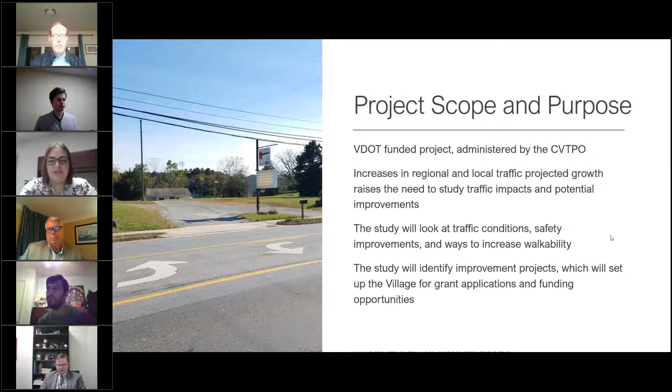The project purpose and scope: this is a VDOT funded project being administered by the Central Virginia Transportation Planning Organization. The need for this study has increased due to regional and local traffic and the growth that's projected. The study will look at traffic conditions, consider safety improvements, and ways to increase walkability and multimodal access. It will identify improvements which will set the village up for funding opportunities in the future. This initial meeting is to get your feedback on the issues and concerns you've seen, so we can move forward in identifying what improvements can be made.

Starting here, we're in the initial phase, shown on the left-hand side of the screen, which is doing the initial traffic analysis. We'll go on to create the study, make plans, and seek funding for those, and then eventually get to construction. So we're in the pretty early phases of the project, and this is the best time to start getting your feedback on what you'd like to see in the future.

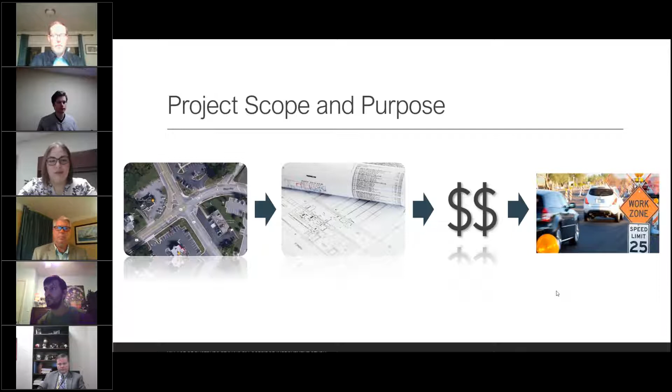So I'm going to hand it over to Bill, who's going to continue on. Thanks, Ada. As we go through the presentation tonight, the purpose is to get your input. So please think about questions you might have. What concerns you about the corridor? Would you want to bike and walk more if it was more accommodating? Are there specific locations of concern? And overall, what ideas might you have for improving the quality of the corridor in terms of congestion reduction, safety, and the ability to walk and bicycle, and whatever else comes to mind. That's what we want to hear.

So thinking about Rustburg, let's start really high level here. The town has been there quite a while, since 1784.

Looks like Bill might have some connectivity issues. Is anyone else getting that? Some connectivity issues? Not hearing Bill either.

Okay, I can continue on for where Bill left off, and once he jumps back in, we'll let him go here. Just a little history and context of Rustburg: it's been here since 1784, when Jeremiah Rust donated the land for a courthouse and a jail. The village of Rustburg has grown to include a complex of administrative buildings, local businesses, and nearly 1,500 residents. The village is designated as an activity center in the Campbell County Comprehensive Plan, which indicates that it draws people.

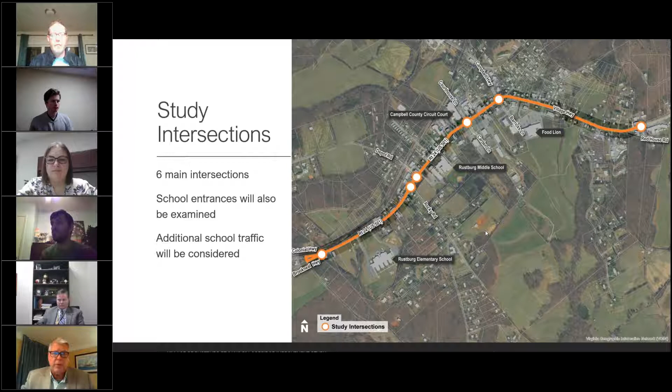I think there might be a delay on your end, Bill. Yeah, there must be. Okay, thanks.

Yeah, the congestion. So one of the key things we're looking at is congestion. Here are some maps where we map out level of service for the different movements at the intersections. Level of service is really a grading scheme, A to F, just like a report card, but it reflects the amount of delay that you experience.

So A through C is pretty good. You're not going to notice a whole lot of delay and congestion. But when you get up into D, E, and certainly F, that's where you start to see you can't make it through the signal in one cycle, for instance, and you see longer queues.

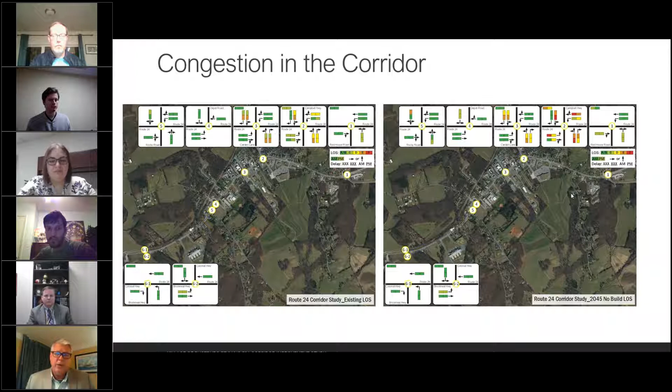The image on the left here, we see a lot of yellow and orange around the key intersections of Carden and Campbell Highway. So you're probably familiar with experiencing some delays there in the morning and evening commute peak hours. Then the image on the right is where we plug in the future projected volumes, and we start to see more yellow, orange, and red, indicating increasing congestion. So we already know going forward there's going to be more congestion, so we need to get out in front of this from a planning perspective to figure out how to address this most effectively.

In addition to congestion, we're thinking about safety in the corridor.

Are we experiencing crash issues? Is the corridor overall safe to drive, walk, and bicycle in?

Now this graphic here is a different way of looking at it. It's called heat mapping, and this is where we've mapped the intensity of crashes. So we start to see places along the corridor that have the highest crash history. The red indicates the higher crash history, so they're around Carden and again around Campbell Highway. And then also interestingly, on the image on the left side where Village Highway comes in from the west, we see a concentration there.

So these are just some of the things we're looking at and thinking about. And again, we want to hear from you about your observations of the corridors, the people who use it frequently.

Pedestrian safety. So we're also looking at, is it an inviting, comfortable, and safe environment to walk throughout the corridor?

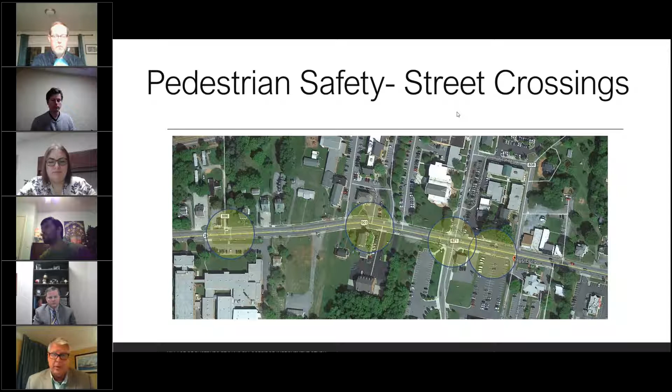Apologize for the delay here. This graphic, those yellow circles are highlighting crosswalks through the core of the village. The point of this slide is that historically, evidently, this has been where people feel they want to cross the road. So part of the question is, how comfortable and how safe do you feel doing that? Are these the right places to cross, or are there other places that are frequently crossed by pedestrians?

So, of course, when we're thinking about walking, we're thinking about sidewalk conditions. Ideally, the ideal sidewalk has at least 5 feet in width with no obstructions. When you get below that, you start to experience problems. People in wheelchairs have difficulty moving through sidewalk areas that are 3 feet wide or less. And of course, you want to be able to have two-way pedestrian traffic on the sidewalk.

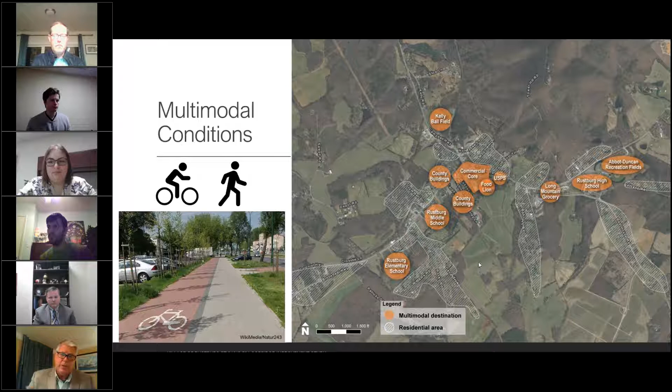Where do you think the sidewalks need improving, and what might help make the overall walkability of the village better? When we think about walkability, this graphic shows the orangish circles as activity centers such as schools and the commercial core—not all of them, but a lot of the retail, commercial, institutional uses. The hatched area shows the residential uses, representing concentrations of residential uses throughout the corridor. Ideally, it would be comfortable for residential areas to access the commercial and institutional areas.

So, think about where you might want to walk and how you might want to get around on foot or bicycle. And we'd love to get your input on that.

Also, when we think about the corridor as a whole, we're looking at traffic congestion, safety, multimodal mobility, but also thinking about whether there's a need to beautify the corridor in terms of streetscapes. These are great improvements to help enhance the overall sense of walkability. They can also be drivers of economic activity, helping a commercial district look more vibrant and attracting more economic activity, improving the tax base and the overall quality of the village. So we'd like to hear your thoughts about that.

As we seek your input, this is one opportunity tonight. We're here at the very beginning of the study process, and we have a survey tool that's available. It's very effective, and David Cook from VDOT is going to give you a tour of the survey tool. You ready to share your screen, David? Yes, I am. Thank you, Bill. Okay, pass it over to you.

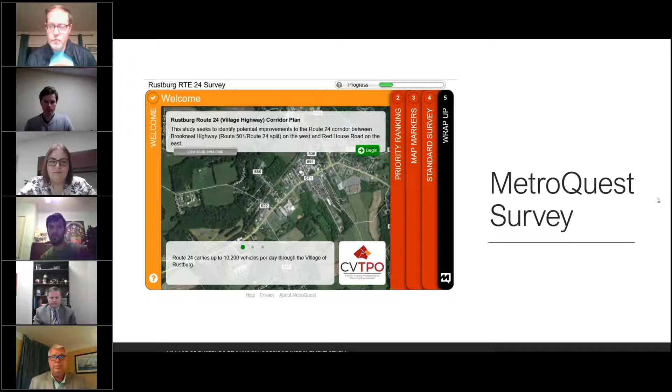I want to confirm that everybody can see the CVTPO homepage. Yes, all right, good deal. So if you go to cvtpo.org and go to plans and programs, you'll find the Village Highway Study.

This is where the study page currently lies. And from there, you can go and click on this link right here that'll bring you to the survey. It's called Complete the Virtual Survey here. When you open that up, it'll bring you over to this survey. This is currently live, and anybody can go in and take this survey right now.

You'll hit begin, and the first screen is kind of a welcome screen that orients you to the study, gives you a little bit of background about the study, what we're looking to accomplish, and gives you a framework of where we want to go with this study, and what kind of input we're seeking.

So looking at safety improvements, looking at corridor access improvements, looking at congestion improvements. You can scroll through here and read a little bit about the corridor. We know that it carries about 10,000 vehicles a day. And what we're looking to identify are operational, access, and multimodal and safety improvements. The types of improvements may be intersection, lane configuration, school access improvements, access management, and bike and ped accommodation.

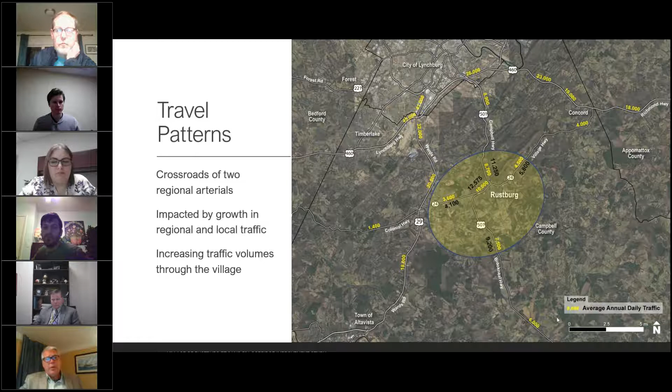Sure, just maybe I could go back to the volumes slide. The need for this study really hinges around trying to make a safe travel environment, trying to get out ahead of any congestion issues, trying to reduce the number of crashes that occur, and again trying to identify opportunities to make the study area more walkable, more friendly for pedestrians. When you put that all together, that also culminates in a more vibrant village area, more economic activity, overall more livable.

And then to rephrase the question of how big of a study is it, they were asking how much will this impact the people in Rustburg? Yeah, that's a good question.

So every major transportation investment starts with a planning study. Planning studies are used to identify these types of improvements that can then be fleshed out to greater detail and put into grant applications.

I'll cite a study from Appomattox that the MPO with VDOT conducted how many years ago? I don't know, the last 7 or 8 years, I believe. It was a $25,000 planning study, and it went into the grant process. David and Rick, please correct me if I'm inaccurate here, but I thought it was about a $10 million grant or so that was awarded for various improvements along the old Courthouse Road corridor.

So again, it's an investment on the front end in planning to identify these types of solutions that can be carried forward into grant applications. It could be millions and millions of dollars down the road that result from the ideas that come from this study and get documented.